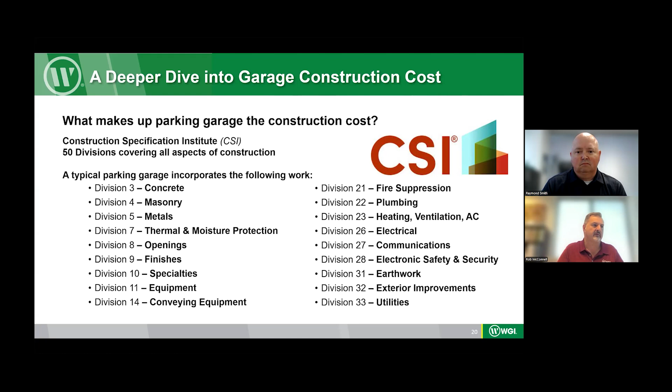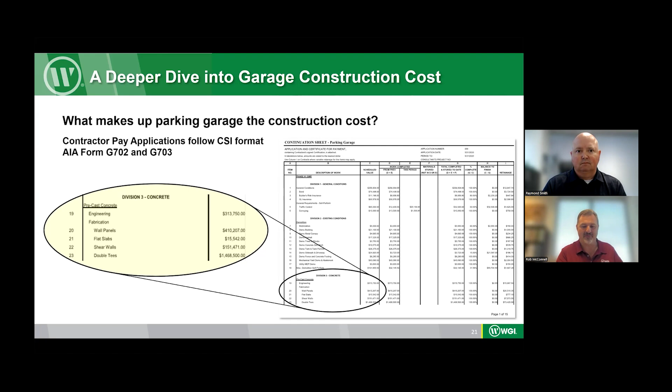Division 0 and Division 1 are administrative. And so the rest of them are actually the different components of construction: concrete, masonry, metals, et cetera, all the way down to the heavy civil work, Division 31, 32, and 33. And on the typical project, your contractor will submit their pay requests using, a lot of times, the AIA, American Institute of Architects, Form G702 and G703, which tracks exactly with the CSI format, and it'll tell you exactly what your costs are for each division, and what makes up each division. And we have hundreds and thousands of these that we go through to kind of vet our costs as we make our projections.

Now, to answer the last question that came up, what portion of the construction cost does the concrete itself, the superstructure, and maybe more than the superstructure, the foundations and the superstructure make up? Yeah, you're right on the money there. It's right in that 40 to 50% of the construction cost. And again, it's going to depend a little bit on the complexity of the architectural facade. But typically it's in that 40 to 50%.

So if you got a number from a precaster, for example, I just got one the other day that was, I think, $42 a square foot. If I were to take that number and double it, I'd come up with about $84 a square foot. If I assumed it was 45% of the cost, I'd be somewhere in the 90 to $95 a square foot, which is right in the right overall cost range.

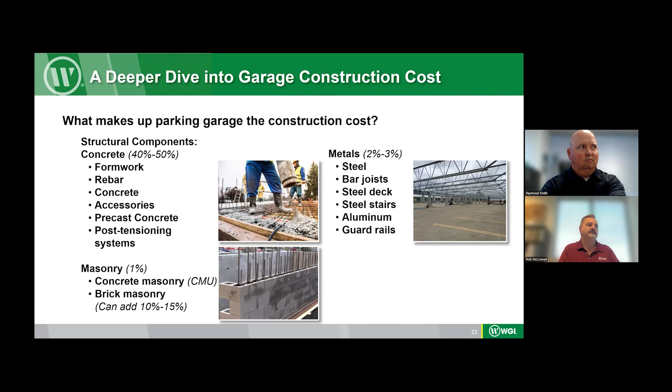Waterproofing, a critical component of parking structures. Can't skimp on waterproofing. Typically, it's in the 1 to 3% range, and again, that's going to depend on where you are in the world and how intensively you need to protect the structure. If you're on the coast in Florida or up in northern Michigan or Minnesota, your durability requirements are much more intensive than if you were in, say, southern Alabama. And durability components are the waterproofing systems and the roofing and the flashing and all that type of stuff.

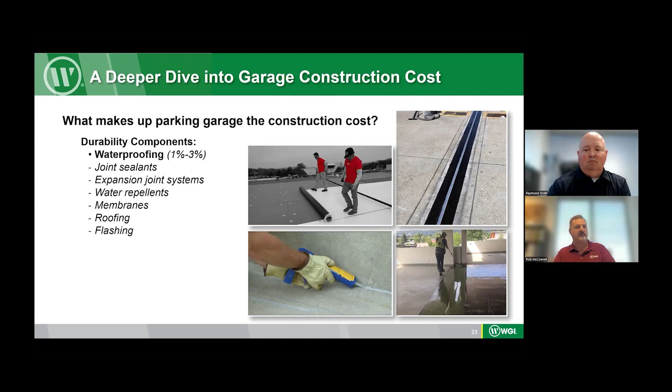Architectural components, typically we see them in the 5 to 10% range, but if you start talking about stainless steel facades or something like that, those things run $150 a vertical square foot. So, it can add up very quickly. Also, if you have to have some sort of high security lockdown type frontage or even the upper levels, then that adds cost as well. Finishes, usually not a whole lot, other than maybe some painting. I guess striping qualifies as a finish, but striping is relatively inexpensive. Somewhere in the fraction of a percent to 5% range.

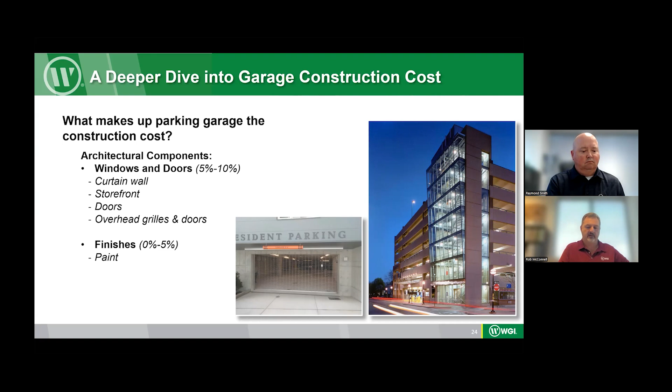There's some parking specialty that you have to consider: parking enforcement and/or access control equipment. Sometimes, depending on how a garage is operated, if you hire an operator to operate your garage, sometimes they bring the equipment with them, so it's just built into their operating contract. But if you were to install it yourself, depending on the complexity of it, if you want full single-space occupancy parking guidance, you could add a couple percent to the cost. A basic system would be maybe $50,000 to $100,000.

And signage is another piece. Again, I'm always an advocate for simple signage. You don't want to oversign things because people start getting paralysis if they've got too much information they have to process. But typically, it makes up usually less than 1% of the total construction cost.

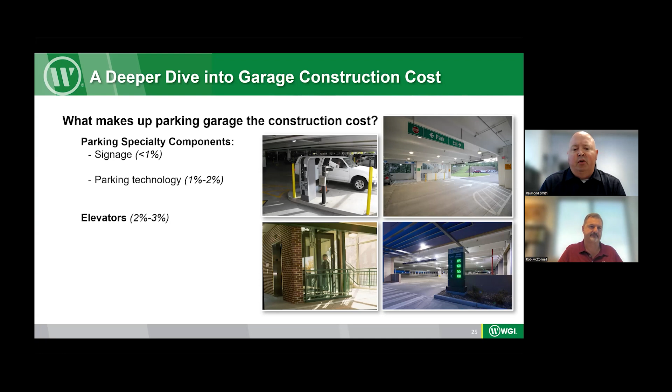And then the elevators are pretty expensive these days. Typical elevators are running something like $40,000 to $50,000 a stop for a machine-roomless kind of standard elevator that we're using. So that can add up depending on how many elevators you factor in. Our median garage, I believe, has 2 elevators in it, right, Ray? Yeah, because the median is based on about 500 spaces as the average garage. A good rule of thumb is you figure about 350 spaces per elevator, and with the average garage being 500, you would want 2 elevators, also for a little bit of redundancy and downtime.

Mechanical systems, that's your drainage, that's your standpipes. If you have a garage that has a footprint over 48,000 square feet, or has a height from the top floor to the lowest level of fire department access over 55 feet, the 2021 IBC building code, in those places that have adopted it, now requires fire sprinkling. I have 3 to 5% typical for your plumbing, mechanical and fire protection components. But if you have to add sprinklers, it definitely can add another 1 to 3% over and above that.

I'm dealing with that on a garage in Mississippi right now, where it's adding almost $3 million to a $50 million budget. So not cheap. And we can have a conversation offline about the necessity of having sprinklers in parking garages, but I'm not going to get off topic to talk about that.

Electrical telecom components, that's your lighting. Really, the only major electrical system in a garage is lighting. There's a little bit of demand for the elevators, but EV charging is becoming a significant cost component in the cities that are requiring it. I believe there's something like 60 cities, pretty much the whole state of California, and then places like Denver and Washington, D.C., that have some pretty significant requirements to incorporate electric vehicle charging systems: EV installed, EV ready, EV capable. Each one of those EV charging stations is typically a 50 amp circuit for a level 2, and a lot of conduit and a lot of copper. So that can add 2 to 3% to the cost of a garage as well, over and above the 6 to 12% that I'm mentioning there.

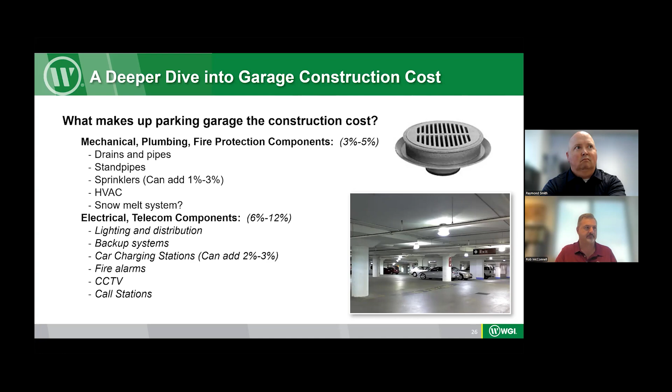And then there's the earthwork. As Ray mentioned, we've excluded the below-grade parking, so this is, I don't want to say minimal earthwork, but there'll be a little bit of excavation, hauling, a little structural fill, a little bit of utility work, but this is all kind of within the site. Our numbers would preclude massive utility projects, or bringing in roads for half a mile or something crazy like that. So civil components within reason are part of that.

We got another question here. Have you had any experience forecasting the cost for additional structural components to prepare for the addition of rooftop solar? Yeah, that's a great question. We do a fair amount of that. Ray, you want to field that one? Yeah, the added cost for solar panels on the roof is not very expensive. We've been asked to do that a lot, and we've incorporated that additional cost, because for the most part the solar panels are light, and the structural framing to support that is pretty light. So we can estimate that for you, but that's a fairly inexpensive item to add.

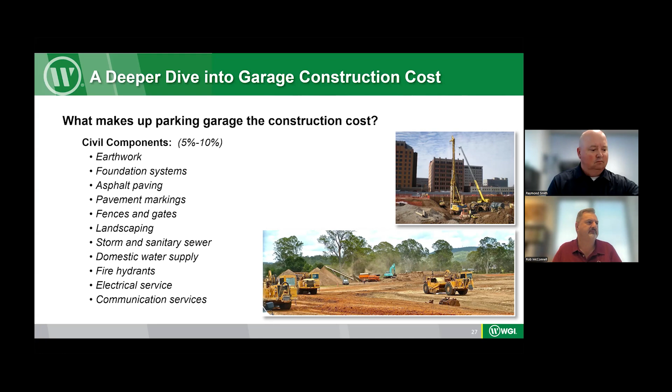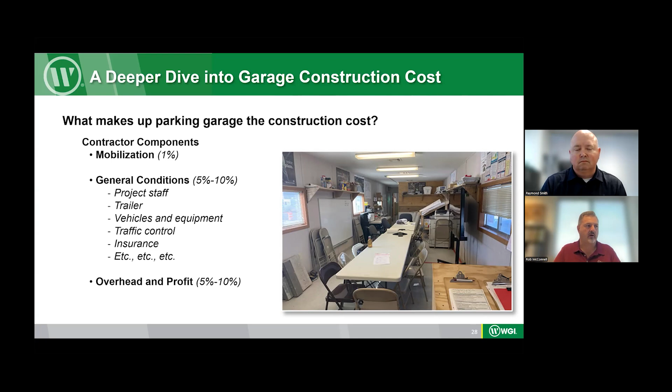That's the construction cost of a garage. But if you're the owner, you've also got to consider what would all roll into the project cost. And so to that, you have to add soft costs. Some of the items that make up soft costs are the design fees for the designers, testing and special inspections, insurance and fees, and management. Some owners also need to add a project management fee because they have staff overseeing the project.

And then there's owner contingency. That can range from 3 to 10%, depending on where the garage is located and the complexity of the garage. Some of those contingencies can be owner-directed changes, things they find out during the construction process that they want to add to the garage. So they have a contingency to cover those things. But for the most part, it's for unforeseen conditions like environmental issues, soil contamination, unsuitable soil.

And one that people sometimes forget about, and it's pretty important to us here in the upper Midwest, is weather conditions. The owner's responsible. They have to have costs to cover that because there can be days where the construction site is shut down and construction can't continue. If that gets excessive, then that becomes part of the owner's contingency for those weather days. If you get a blizzard and you shut down for a longer period than normal, you've got to account for that.